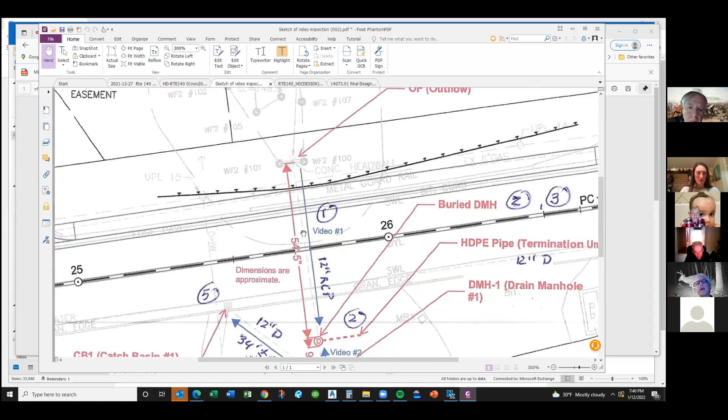So point 1, I think in general we're all in agreement that it is in fact a reinforced concrete pipe and that it has structural integrity. However, as Frank says, there are some issues the videos also revealed. Point number 2 identifies the fact that there is standing water in the pipe, beginning with about 3 inches of water at the outfall, and then gradually decreasing in depth to about a 1/2 inch at the other end of the pipe, the upstream end. I will also pull up a sketch to better identify this. At the outfall there was approximately 3 inches of standing water, and that depth gradually diminishes to about a 1/2 inch at the upstream end of the pipe, which, as it turns out, is at the location of a buried manhole that none of us were aware of. There's no plans for it, there was nothing to indicate that other than this video.

With that in mind, I think that takes us to points 3 and 4, which are the potential causes for that standing water. One, and this is what we think is the most likely cause, is that there is a buildup of debris on the downstream end of the pipe, preventing the water from fully discharging. Jeff, you can chime in on this as well, but the site superintendent did go, after being made aware of this, to try to see if he could tell if there was a blockage. I think part of the problem was that there's standing water outside the pipe, and we really need to do a more thorough survey in this area. The intent would be to clear the blockage if that is in fact the case, but we would want to verify it by survey first.

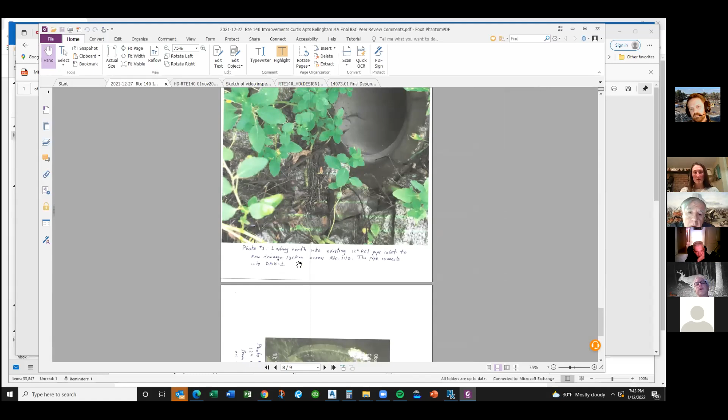That actually is not the outlet, that's the inlet on the upstream side. That's photo 1. Yeah, that one there is for the inlet, and the intent of that was to show it's not blocked on the upstream side. Okay.

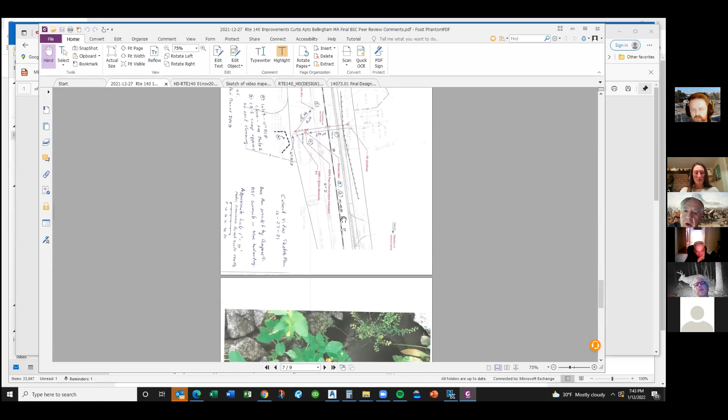Jumping ahead a little bit, one of my questions - there's the second picture you saw, that unknown pipe going into the buried manhole. Sounds like a mystery, but there's a ton of material in that pipe and in that buried manhole.

So one of the questions I have, maybe long-term, is whether the blockage at the downstream end of that culvert is caused by this silt, when it flows into the middle of the main drain pipe, the 12-inch drain pipe that goes across under Route 140. Is that what's building up at the downstream end after a storm and causing that backup?

That's our theory - we don't know for certain, but that's what we think is happening. Right now the ground is frozen and has a lot of ice over it, so we haven't had any luck - we haven't actually physically tried to touch it yet. We tried to put a puddle pump down there to see if we could correct some flow that way, but we were having issues with the pump that day, it kept getting clogged up.

So my point in going through this is that if this other issue isn't addressed over time, you're going to have continued buildup. Every time you get heavy rain, more silt's going to go down, it's going to build up at the downstream end, and there's going to have to be ongoing maintenance. I have no idea, and knowing Mass DOT, it was probably before I was born the last time they cleaned this culvert out, but that being said, I think it's an issue that needs to be investigated.

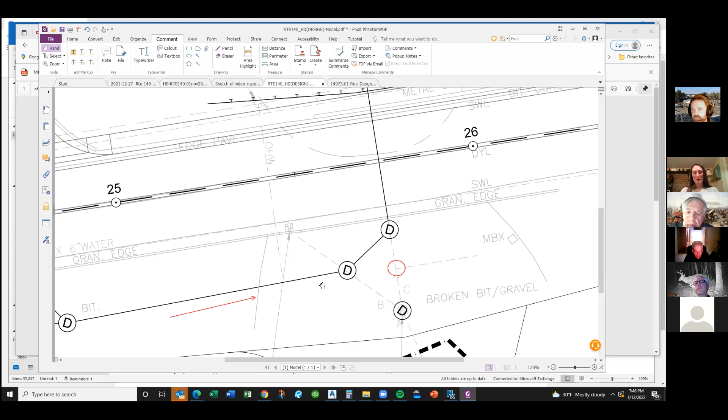Knowing how slow Mass DOT is, I had a quick chat with Cliff and Ann earlier and mentioned that Campanelli would be interested, when we're cleaning out the other structures, in also cleaning out this structure to try to coerce Mass DOT to come out and investigate where this pipe goes and what its condition is at the other end at the same time. Eric Nascimento at Mass DOT put something to that effect in an email to us today, saying they'd want us to notify them when it's going to happen so their maintenance division can come out to look at it.

So if that were to be the case, then that newly discovered drain manhole, which is half full of silt, could be cleaned, and maybe the termination could be discovered, because otherwise it is connected to the existing system, and the contributory silt could still create a maintenance issue down the road, right, Jeff?

I 100% agree with your assessment. That statement is correct. So the only other choice we would have is to just terminate the ends of that. And I don't think that's a good idea, because if there's water getting in there, it could create issues with pavement and or the ground over the top of it.

Campanelli is definitely willing to clean it out. Now, in terms of terminating something that Mass DOT may have allowed to be connected to their system, and I have no clue what process, where that's coming from, what agreement's been made, what legal documents have been passed, Campanelli would not want to be the one to terminate or disconnect that without Mass DOT's direct approval.

Okay, that makes sense. So Eric reiterated that they wouldn't want to make a disconnect without investigating this fully. And they even indicated that it might be something that they had put in to relieve some flooding on the road itself.

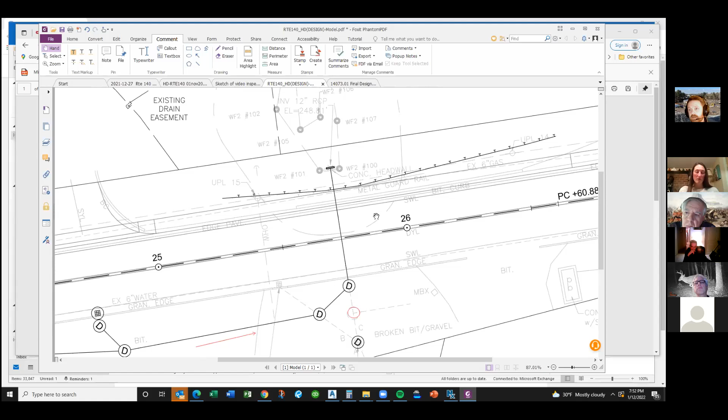Agreed. And I think the other thing he noted, he didn't get a video of that day, but the forebay from Lincoln was actually spilling over their spillway when he was out there, and that was seeping back to where the ponding was happening at the end of the outflow pipe. So it was exacerbating the issue.

Well, that would seem to indicate, as Frank was saying, that you don't have a positive grade there. Yep, I agree.

I know when Lincoln built that one, I don't think they were concerned. They were looking for a discharge point to the resource area after they got their pretreatment, but my guess is that they didn't shoot any grades there either. Or they would have discovered, if it's the case, that it would be running back into the pipe.

My thought would be, if you're going to do some surveying, you maybe take it down till you're a foot or so below the outlet elevation or something like that. I'm not hoping you have to go a mile to do that, but I'm just thinking you got something where you could have a positive grade of 1 or 2% at least going out of that area.

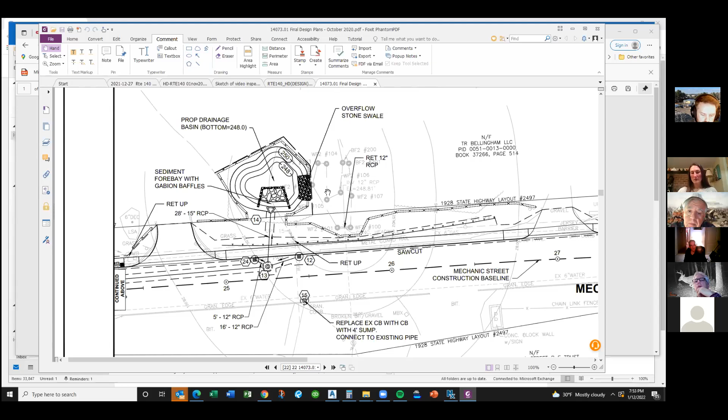Now, if he's like 300 feet out from the end of the outflow pipe and he's still not anywhere close to getting a foot below, I'm probably just gonna have him stop there. I think you're right. That's going to be a different issue.

Yeah, based on our field work, and we've been out there 3 times, I think that the grade really starts to drop off, probably about 20 feet from the outfall, maybe a little more. Yeah, right in that area.

You might be right, I haven't really trudged enough. It's with the foliage all being dormant. It's a good opportunity to get a good lay of the land without having all the greenery in your way.

Right, and to your point, Frank, I don't think we have enough updated survey to really, at this time, without going out there and taking new shots, be able to fully identify where we would get positive drainage and how far we'd need to go with any kind of removal.

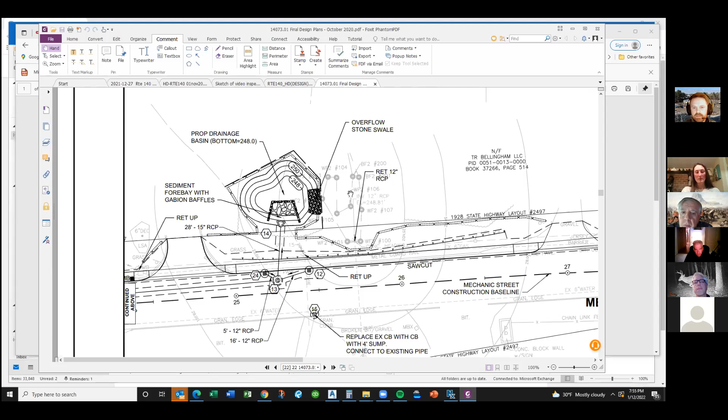So that would be the reason to get out there and verify that now, or once the weather opens up. What I want to try to do is coordinate it to see if I can tell Mass DOT when we can be out there, because I would like the surveyor to survey the inverts

inside of that buried structure at the same time. I think that would be a good idea. Yeah, it makes perfect sense.

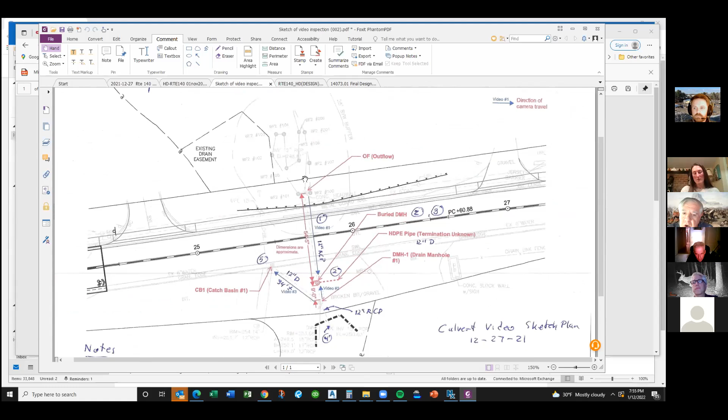And then maybe sort of determine how far down outside the outlet is the sediment. It's obviously going to be relatively fresh because that buried manhole, there was, I don't know, 6 to 12 inches of soil on either side of it.

And we're not in the video right now, but if you back out from it, you can see where the drainage coming from the catch basin, when it flows from the unburied structure, DMH1, blows past and just sweeps up the sediment that comes out of this pipe and sweeps it right down the outflow pipe. Carved a little channel right through the manhole. Yeah, I think everyone's in agreement with what's going on. It's pretty straightforward.

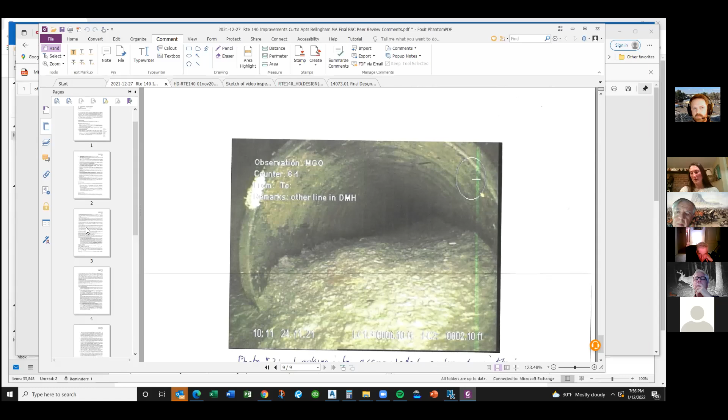Now, before we continue on any other points, maybe in the interest of time, if we just sum up our points in an email to Anne, that she can circulate back, so we don't chew up too much time in the meeting tonight. But overall, from looking at the bird's eye view, I think Campanelli is committed to definitely seeing this through, helping try to resolve what we can. I don't think we want to take on too much of, according to Mass DOT, we don't need to remove it per their regulations.

So what are the next steps that, aside from having it investigate and try to solve what's going on at the outflow, aside from the outflow, what other next steps or other roadblocks or hurdles does the commission have that would prevent us from moving forward?

Well, I think resolving this issue here is pretty much it. In Frank's letter, his last comment letter, all of the issues that he raised and all of the issues that the commission had raised were addressed, and it was just a question of scoping the drainage structures that are buried to find out what's there. I think it's fortuitous that the hearing process is still open, because if we do a little bit of work immediately adjacent to our resource area, we don't have to go through the amendment process. So I think this is the last obstacle.

Sure. Frank? So yeah, I think Cliff - this is Russell Dion. Can you hear me for a second? Sure. Okay, great.

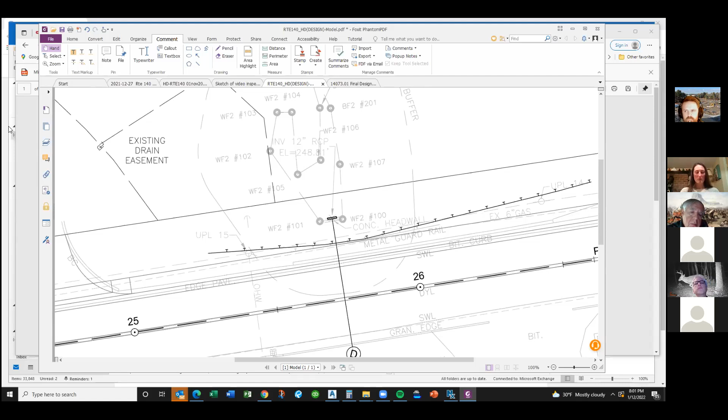Right, I agree. This is just temporary until ultimately - I'm just projecting - let's say 30 feet downstream we hit a positive grade. We'll want to engineer a swale that's lined in a way that everybody on this call agrees with. So I know there's going to be some work that channels the water from the outfall to a positive grade - I know that's coming. I'm just trying to make sure that in the meantime, new rainfall doesn't continue to bring sediment out of the pipe without us being able to observe it. I'm just creating a little observation port, almost like a mini plunge pool. Yeah, exactly, a good way to put it.

I don't have a problem, I think that would be fine. I agree. Okay. And then what we can do is actually see what the condition of the resource area is. I think that wetland flagging was a result primarily of hydrology, not necessarily vegetation, because I recall a lot of silt there.

So there may be a couple things we can do in the field that would meet the performance standard and still get us the positive grade. I've got a couple ideas already, but we need to see them in the field and work through that. There might be a way to just connect a couple of those flags, get the right grade, put some soils in there and seed it. That would take care of any minor alteration that occurred as a result of the silt removal.

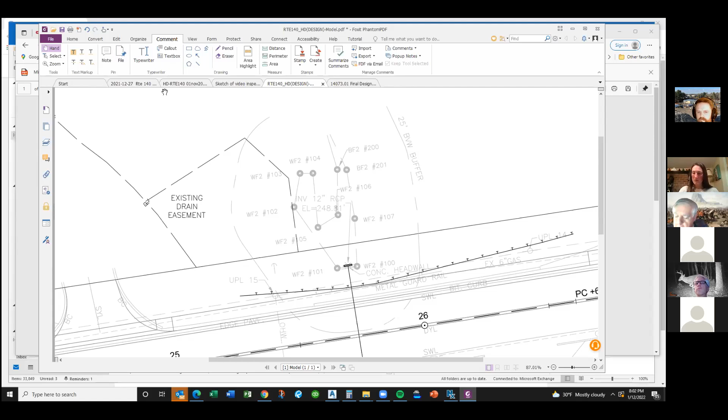Okay. All right, so I guess we're going to wait. We're going to wait for your response, and we're going to wait for the window.

So you're going to memorialize the meeting with an email or a letter or a note, and Jeff is going to mobilize his crew. As soon as the window of opportunity arises, we'll go out and look at the field conditions, and we can move forward on that basis.

Sounds like a good plan. I just have one more question.

So I've been wondering for some time now after watching the video, what happened to the frog that your camera chased up? I believe that my site super may have turned him into a prince, but I'm not sure how. Only kidding, that was funny. That frog was something else, he was like 'hey, this is my house,' he was a big boy. That was good. I'm surprised we only saw a frog, sometimes we see lots of interesting creatures down there. Well, if there's a frog, there's probably a snake.

Yeah, right. Okay, so what would you recommend as a continuation date? That's the next thing. I'm not sure when the weather is going to cooperate with us. I was just looking at the forecast. We might have a small window next week to try to do something, but...

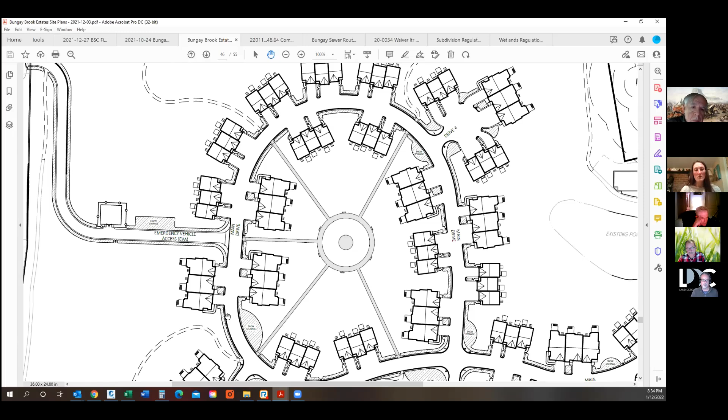Just a quick question, if I could, Mr. Chair. Sure. Are any of those areas that are marked as for snow storage have curbing on the edge of this paved area before you hit the grass? I can't remember, some of them have sidewalks, but not everywhere.

There is a Cape Cod berm, essentially. Okay, that's required. And the second - well, it makes sense. I mean, having a road without any pavement on the edge, like it stops erosion. Okay, fine.

The second, and so my concern would be for the longevity of the maintenance as the plows - at least my street, where it's not much better than Cape Cod paving berms, whatever you call them, on the sidewalk - they have a habit of catching and chipping and tearing up chunks periodically.

But also in those areas, especially the larger areas that you show - for example, there's no landscape, like the one right just above where your mouse is. Yeah, there's that large area there. There's no landscaping in the way of vegetation, like trees, shrubs and stuff. There would be trees, I didn't take it to the next level of - I'm just curious, general question, you don't have to show trees.

I'm just - a lot of bushes and plantings and landscaping, which I assume you would, because there's a lot of areas you're showing for snow storage, and those are vegetated. You're going to kill the vegetation by piling snow on them, unless it's a full grown tree, you're unlikely to have the vegetation survive. So it's kind of - yeah, you could pile it there, but you're going to have to re-landscape every spring, which doesn't make a lot of sense.

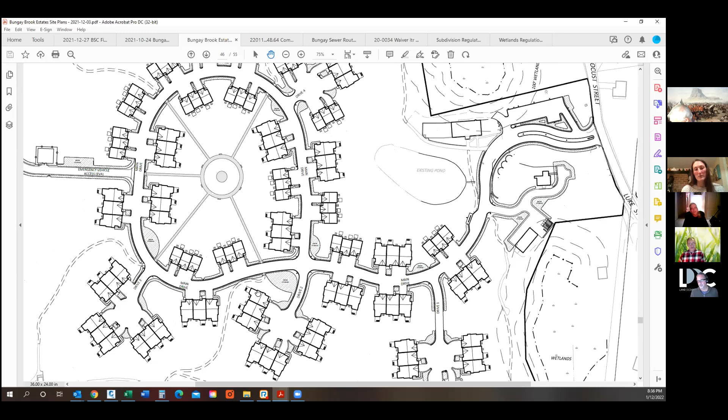Well, if that's measured by an engineer as designed for - how many inches of snow is that going to handle, those snow storage areas? Yeah, I don't have an answer to that question. I don't know if there is. I don't know if there's a formula for that, honestly.

Well, I figured it's just a sheer volume measurement - if you know how many square feet of pavement there is, and you have 2 inches of snow, how much of a volume of snow is that? Yeah, and I grant wet snow, dry snow, all that, but there must be a range of - okay, you're gonna have X many cubic feet. Well, how big are these piles going to be, reasonably, before they obstruct views on the corner or be unwieldy? So there's no prediction.

I'm not saying we're going to have terrible snows the first year this is built, but if it's only designed for a 1-inch snowstorm and it can handle it fine with some piles throughout, that's one thing. If it can handle a foot, that's a lot more comfortable.

Yeah, I think there's so many variables. I've seen in other towns where they actually have a requirement and a calculation for snow storage, where it's whatever, 3 or 5% of the impervious area or the paved area, because obviously you're not going to necessarily accommodate the roofs, but yeah, I've seen a couple towns actually have a requirement.

Is it in those towns a requirement that's measured sort of like the storm infiltration for a detention basin - a 100-year storm, 50-year storm, which is X many inches of rain in a period of time and all that?

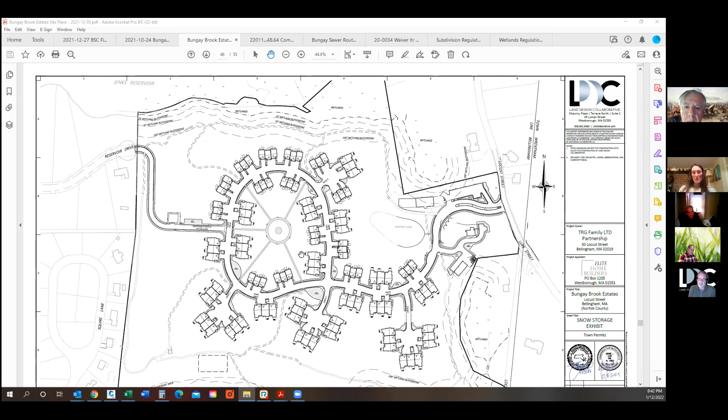And again, we did the borings. I think we all know what the soils are like out here. The test pits aren't going to show anything out of the ordinary - the soils are consistent, it's sand for 25 feet deep. So we're not expecting any surprises. We're not expecting the testing to change anything.

If it does, then we'll come back to the commission with either an amended order or what, but we're not anticipating that. I think we're not anticipating any surprises with the soil. It's pretty consistent. Yeah, and that's what we've done in the past, and that was the intent of the regulation, to eliminate the need for changing on the fly, modifying stormwater management structures when good construction and good engineering practice indicates that you get all your information prior to the design of the plans. This has always been the way we've done it.

We already stated that one test pit per structure is enough, and we don't need three. And that's based on our estimation that the soils are appropriate. I mean, if we were in a situation where we had clays or silty loam or loamy silt, we would be in a situation where we'd need all three.

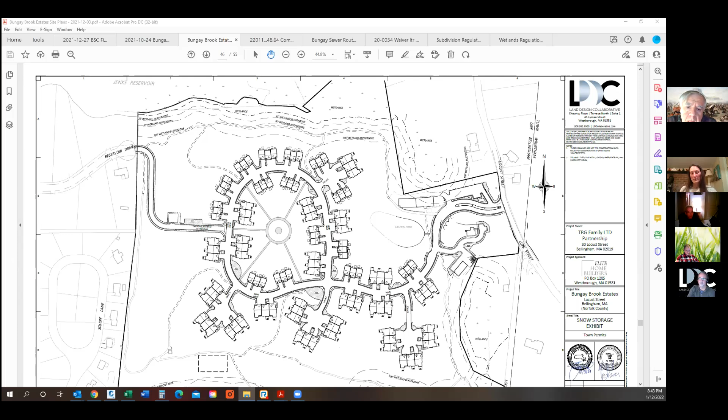Just out of curiosity, and again, it's been a while since I've actually had an opportunity to look at the plans in depth, but there was the one boring that you did where you had some perched soil. Yeah, okay, I'm trying to get to the grading plan here. I'm just looking at the overall plan. Let's see if I can locate the borings that we have.

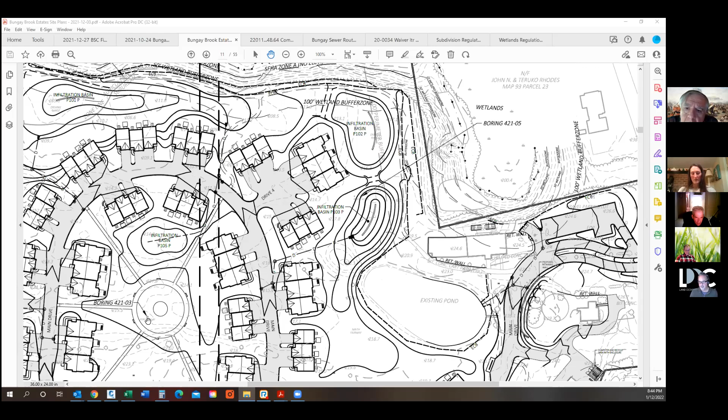They might not be the best. So here's one, right in the middle of the site. This is one up here, located next to this basin. Trying to figure out where we had the rest of them. There's another one here. This one is sort of in the upper right corner. Yep, right here, right there.

So a question, I think you have 8 basins, if I remember correctly. Do you have an idea how many of them have like 1 or 2 foot of cut and how many have 5 or 10 feet of cut? And the question I'm really getting at is, could you do, in the shallow ones, a 5 or so 8 foot deep excavation now? And maybe there might be some leniency for the future with a deeper one than that?

Yeah, so I think we have 5 basins. We have one here, here, here, here, and then this one I think was 2 in the past, we combined it to 1. And there's one in the middle, oh yeah, I'm sorry, I always forget this one. There's one here as well. So 1, 2, 3, 4, 5, 6, 6 of them.

So this is the deepest one. This one I think is about close to 12 feet deep. This one I believe is the shallowest one. And then these are somewhere in the middle.

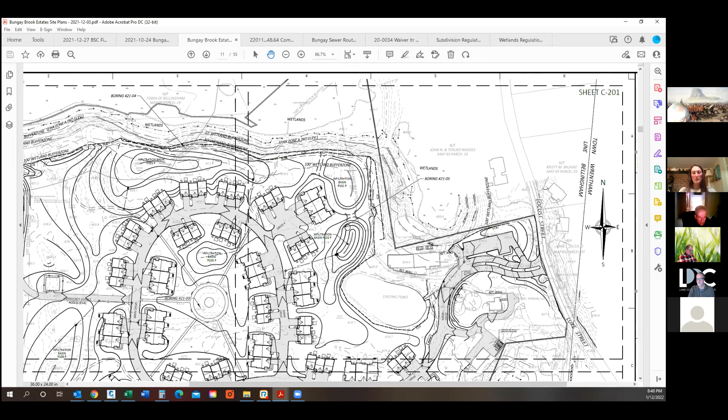And what we had was several feet to 10 feet of dry sand. It was loose, it was dry. Then we got a wet layer, and then we got dry sand again, all the way to the bottom of the boring, where we actually hit pretty much groundwater in every hole.

So we did 25 feet in each case. There was always a significant dry layer. And then in those instances where there was a wet layer, it was shallow, it was narrow, and then there was another significant dry layer below it.

And so as we discussed earlier, we did add this, and it was a suggestion that Frank made, and it's reasonable. I don't know if I mentioned it to this commission or the planning board, but we did do something like this on a site in Acton, Mass, and it was for a septic system, but basically went through the confining layer.

It was good sand above, good sand below. And essentially you connect the two layers of good draining material, and you know that the water is going to go out. You still have plenty of depth for filtration, plenty of depth for lateral movement of water. You're not relying necessarily on a column.

So that water will always continue to move laterally if there was some minor siltation of the basin. But I think it was that one in the back up against Pine, by the neighbors on Squire, to the south of that area, that was the one that's most problematic for an open boring.

Or sorry, for an open test pit. Because of the depth, the basin depth itself, the hole's going to be a massive hole just to get the depth, because the hole's just going to continue to collapse. So the excavator's going to have to dig a big hole and work his way down in there. The other ones are probably not so unreasonable, but that one is certainly a challenge.

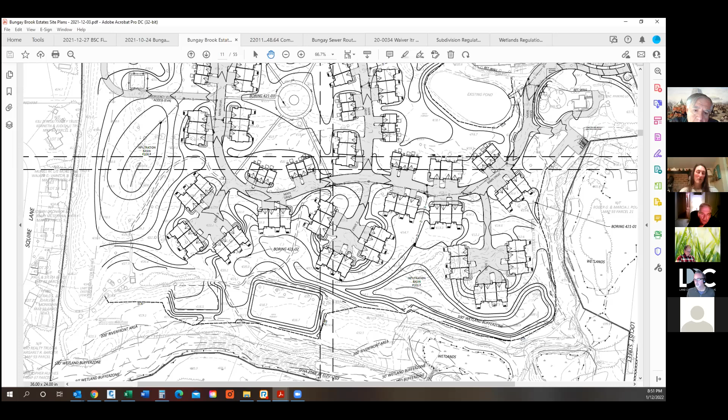So, let's get back to Frank's original idea. It looks like we have one area that is problematic for making because of the cut that you have to make.

So let's do the investigation in the other basins, and we'll defer to basin construction. When you start roughing out the basins, you can do the evaluation there, because you're going to be roughing out the basins before you start building on units, right? Yes, yep.

Frank, does that make sense? Yes, yep, that's correct.

Is there any basin of those 6, other than the really big deep one, that has some room to move, that he would have to relocate if he hits a perched area he can't break up, as we talked about? No one, especially the applicant, wants to move or remove or eliminate units because there's no place else to put the necessary detention basin that has to be shifted because they hit an area. Are there any of those other 5, other than the big one, that are like that?

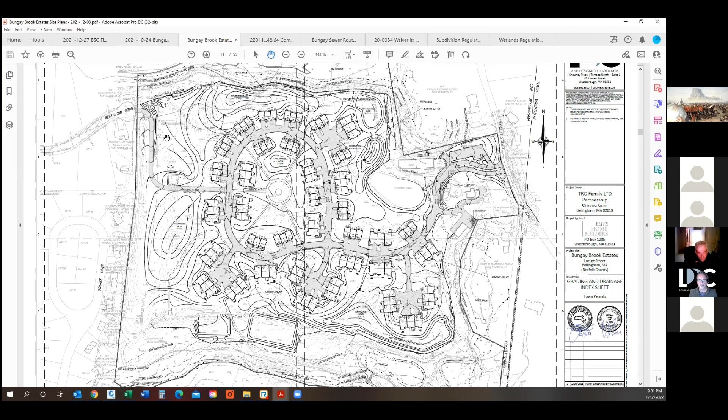Okay, so I guess, good, we have a consensus here. So, timing, the calculations, you almost had them today. That's not going to be an issue, I would imagine, and I think every other comment has been addressed from our perspective.

We're gonna need the revisions reflecting the roof leaders to the rear of the buildings, and then the test pit data, one in each basin for the 5, and we will condition the 6th one.

And what are we looking at for timeframe here? I just want to make sure we don't have any surprises at the next hearing. There was one other waiver we requested, the alternatives analysis. We had talked about that before, and we revised the plans to move whatever work we did have closest to the buffer outside of that. So we are requesting a waiver from actually doing an alternatives analysis.

There aren't any homes within the 100-foot buffer. We're not clearing any trees within the 100-foot buffer, and we're not touching the perimeter trees at all. Whatever work was closest to the wetlands, we already moved away as part of the design and permitting process. That was one of the other waivers we're requesting that we didn't talk about tonight. You're right, we did not talk about that. I think in all good conscience, based on the work that's been done and our knowledge of the site, that will not be required. Okay, we appreciate that, thank you.